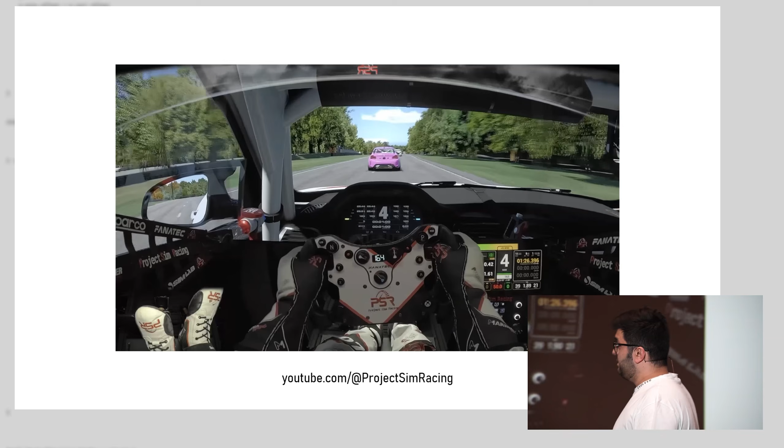On the other end of the spectrum, you have something like this, racing simulators, where you'd have a guy who has a multiple $1,000s expensive racing rig and would be moving around, honing their craft and practicing for many years in competitive online racing. And that is also an experience, and they're both vehicles, and the principles of how they were programmed in the engine are actually the same, the major principles.

So programming cars in games and car physics in games is an art as much as a science, actually, and everybody does it differently. So why is that the case? Why does that happen? Because as I said, when you have those physics-based games, or RTS, real-time strategy, or when you're moving a character, you expect a certain behavior. Why? Because we are intimate with that behavior from a first-person perspective. But when it comes to cars, the experience is not really necessarily first-hand.

It's a second-hand experience that we map into real life, and a lot of it is coming from pop culture. Almost all of us have an understanding of what a racing car is supposed to feel like, even though very few have ever actually been in one, let alone driven it.

So even a kid will know, I want a car that feels like I'm doing something when I'm shifting up gear. So the main question you have to ask yourself if you want to implement a car in a game, and this is what the talk is aimed for people interested in doing that, is what experience do I want to convey? And the more important leading question is, how do I even implement that experience?

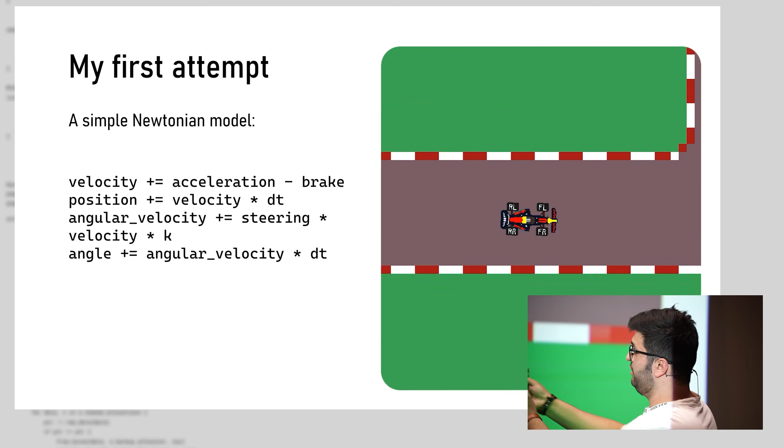But what's happening is that I'm controlling the velocity through acceleration and braking. I'm changing that multiplied by dt. The angle that the car is turning in is moving by an angular velocity that I actually smartly hook to the velocity so that it doesn't turn when it's standing still. And that's it. Now, this is as far as I could think of when I'm thinking about this.

And I'm like, does this look like a car to you? It's not. This is, I don't know what this is. Something robotic moving on rails.

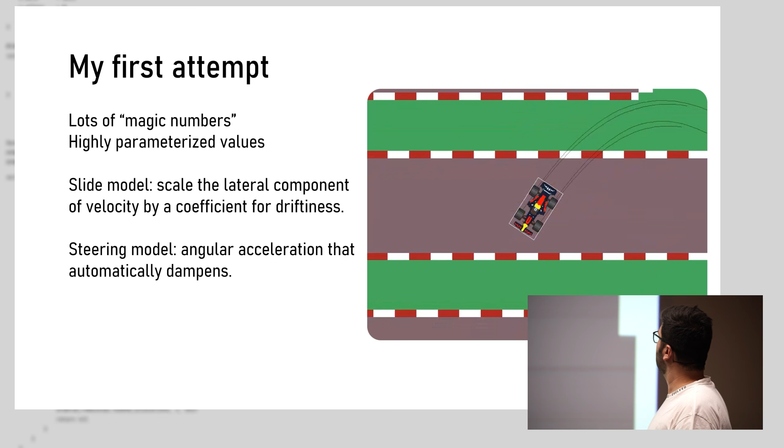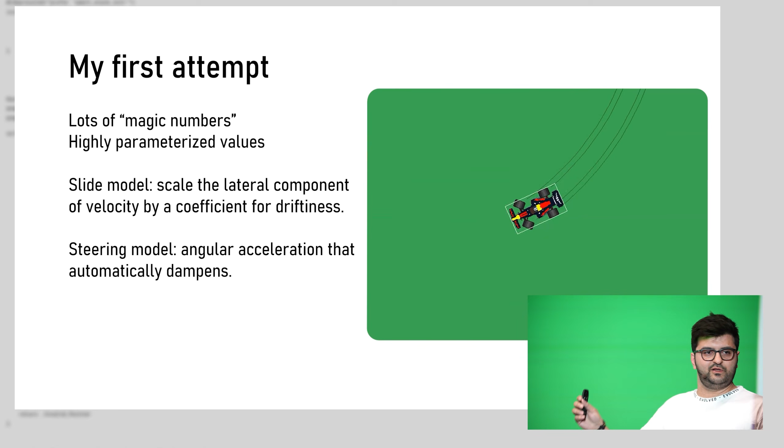So I went through a second iteration where I thought I would make it a little bit more smooth. See, at that time, I didn't know how the physics worked that well. I thought, like, I understand the experience somehow. I've played a lot of racing games, so I need the car to slide a little bit when I turn, but the slide has to be smooth, so I started to implement smooth step functions and more non-linear analytical formulas that describe the movement of the car.

And it looks better. I mean, like, it's sliding a little bit. It's drawing a trail behind it that's pushing the back wheels a bit.

Now, when I did this, it was during the time where Casey was asking, like, does anybody have something to demonstrate? And I showed this to him. And he told me, doesn't this feel to you like the car is a little bit on ice? And I think I agree. The car looks like a floating spaceship moving around. It doesn't feel like the wheels, like the tires, are what's carrying the car around. It feels like it's all on a pivot, because it is, honestly.

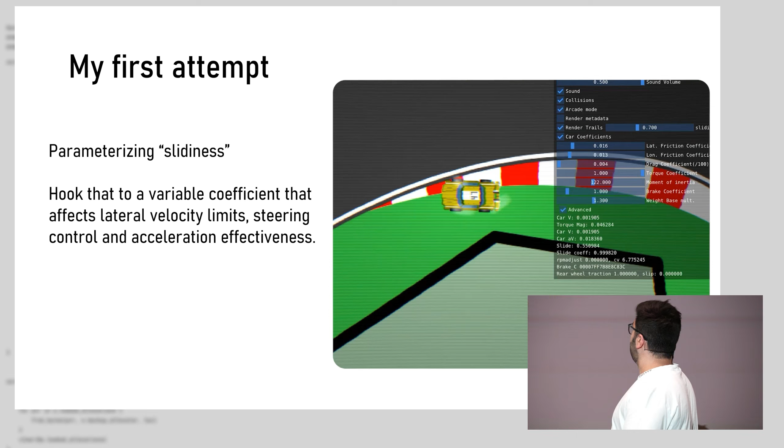So I went to a third attempt because I was dead set on faking this as best as possible. So I added even more magical numbers, and I made a parameter out of the slidiness of the car so that it increases the more the angle increases, and this changes other things through time.

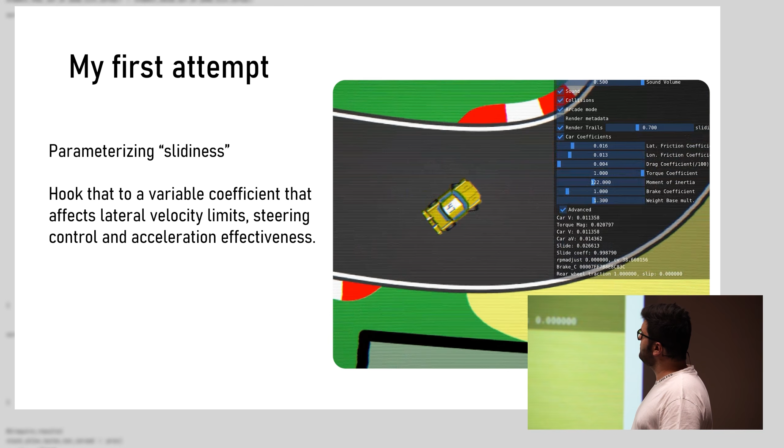And I have no idea what's happening with the video, but you see the car now. This is actually something closer to the final version that I pushed for that game, and it really feels solid somehow. It feels fun to drive in the end.

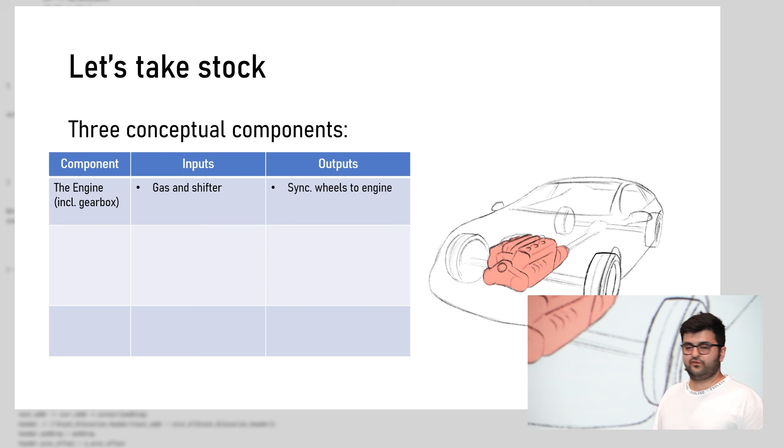In this case, this includes the gearbox as well. In simple input-output terms, this takes the inputs of the player, which is the gas and the shifter, and outputs the speed to the wheel, synchronizing with the wheel because the engine is running at a certain speed that synchronizes with the wheel speed. It's multiplied by the gear ratio.

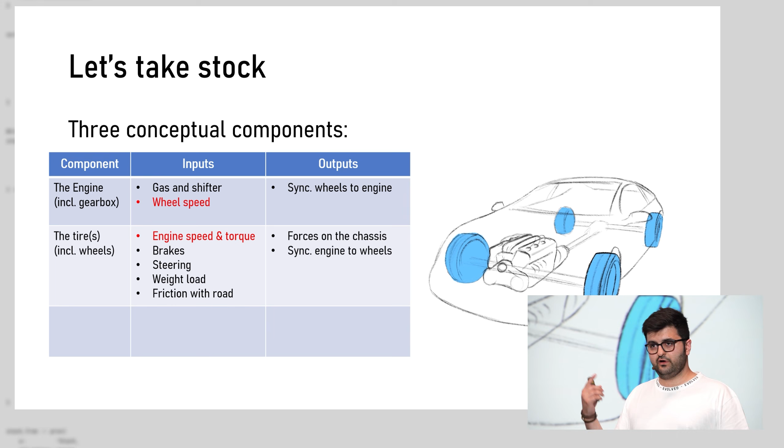The next aspect is basically the wheels and the tires. That one takes the input of the engine speed and torque from before, and takes the input of the player, which is the brakes and steering, and the weight load from the chassis sitting on top of it, and the friction with the road. That's a very important aspect we need to get into. What it outputs are the results of those friction forces that apply on the car, and also a speed that synchronizes with the engine. So there's this differential relationship we have to figure out, because the engine synchronizes the wheels, but the wheels also synchronize the engine.

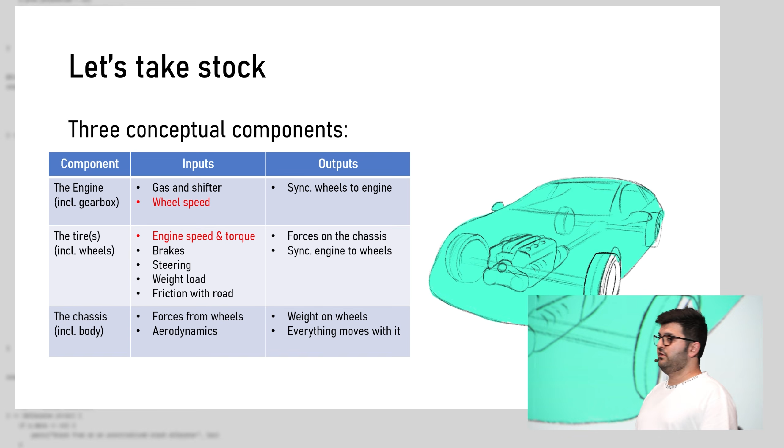The last aspect, and the simplest one, is the chassis. The chassis is a simple rigid body. This is the plug into the rest of your physics engine, because you hook everything to this part. It gets affected by aerodynamics, drag, and gravity. And wherever it moves, the wheel moves too. So that's its effect on the rest of the body.

So how do games approach doing this? Because this is way too high level, and each one of those components is complex. Well, the reality is, depending on the game, they cut corners. The problem is you can't really simulate everything. I don't think anybody, except maybe engineers in some basement at Porsche in Stuttgart, is really figuring out the fluid dynamics of fuel moving through the pistons. Nobody's doing that. In reality, even in the most complex racing simulators out there, at some low enough level there's a black box, and that black box is just calculating something similar, something simple, taking some input and churning out some output. So how do people do it?

Because it's starting to look like there's a million ways to do these things. Well, actually, there is a million ways to do these things. There's no definitive bible out there when it comes to programming vehicles. I can't point you to one implementation and say that's the solution. It's not that easy. Often the really interesting parts and the crux of the matter are proprietary, because that's where there's a lot of competition to get this right. So in the end, you will have to actively choose the corners you're going to cut. You're not going to get that satisfying feeling of getting the simulation right. I don't think you can, because you have to cut the corner at some point.

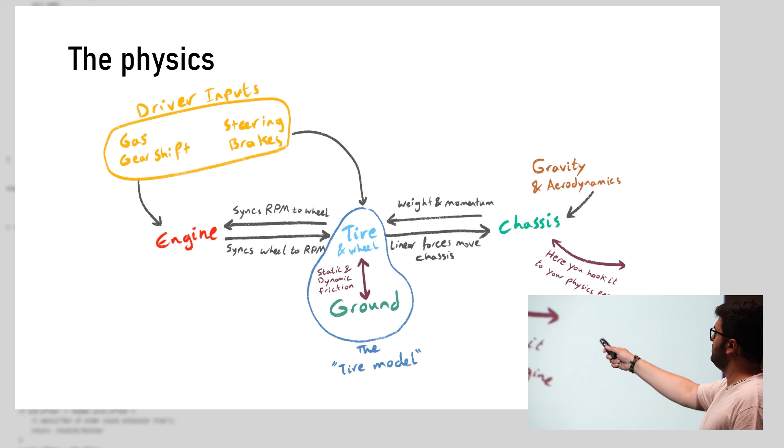So to put this all together in a visual form for visual learners, we have three components: the engine, the tire and wheel, and the chassis. There is a continuous differential equation on the horizontal axis. The engine synchronizes its speed, the RPM speed, to the wheels, and the wheels synchronize back to the engine. The wheel itself applies forces on the chassis, and the chassis moves the wheels, so there's this back and forth.

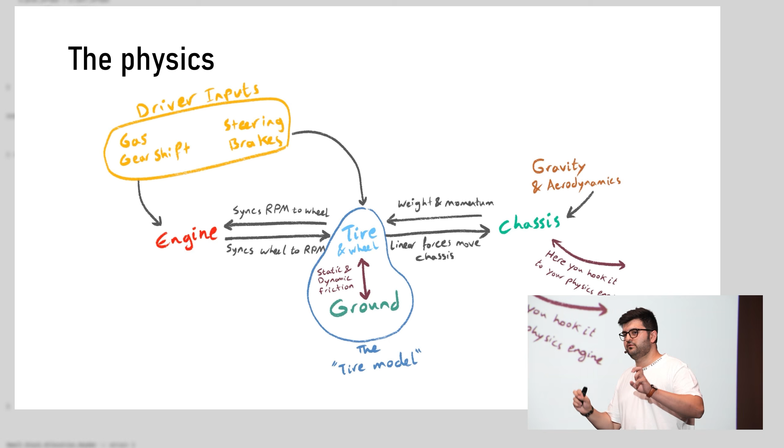The chassis hooks to the rest of your physics engine, and the meaty part of the simulation is actually the tire, because that's the thing that sticks to the ground and generates the forces. All of the forces come from the tire — that's the tire model, for those who know that term from racing simulation.

So let's start with the first section, the first algorithm: the engine. Now, the engine is maybe conceptually the most complicated part of the car — it has the most moving parts. But in code, it's the simplest part, because actually it's just a basic torque calculator. It cares about one value, and it updates just one value.

So plotting some somewhat realistic data on how much power, torque, and revolutions per minute — power is how much power the engine generates. Let's assume it's always constant; in this case it's 100 kilowatts. At a rotating speed of 5,000 RPM, it's generating 200 torque. Now that's way too fast for the wheels, especially if you want to start driving the car, so you have to scale that down. But by doing so, you increase the torque — it's just a simple physics relationship. So the transmission scales it down to 1428, the differential scales it down to 380, and in the end at the wheels, if you multiply it with the radius, you have a linear force of 9,500 newtons. It's a huge force that gets you a lot of turning for a smaller rate.

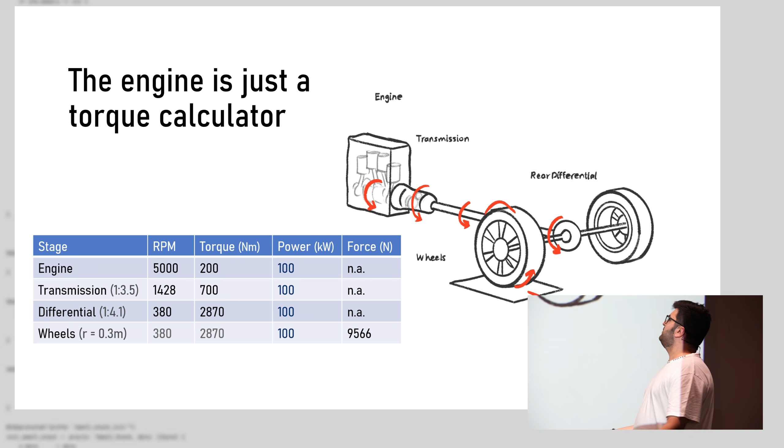Now, why am I telling you all this? Well, to understand that the power is also variable. Because for those who are intimate with cars and are fans of cars, you may recognize this shape of graph — two curves, two hills near each other. One represents the torque, the other represents the power. They're more or less conceptually the same thing, just multiplied through the drivetrain. If someone is interested in the formula, it's there.

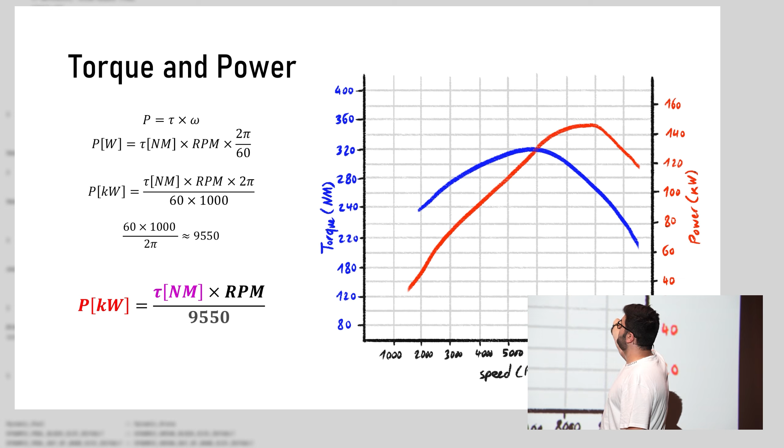What you need to care about is that if you want to make the car feel realistic, you'll realize that depending on the RPM value of the engine, you get a different amount of power out of the wheels. So if you're driving around and want to make the car feel real, you need to make it variable, even if it's not the exact same graph. If you look up different engine graphs, you'll see the peak is sometimes lower, sometimes moving left or right, sometimes the slope is steeper, sometimes flatter — each one describes a different engine. That's the important point to take home.

So, okay, I understood that — how do I put this into code? Well, you fake it. I'm going to show you a little abomination I did once. I don't think you'll find this in any book because nobody does shit like this. This is just me sitting around at Desmos for like an hour or two until I figured out something that looks like that curve, with enough knobs that I can turn to play around with it. That's it — I wanted the ability to control the curve.

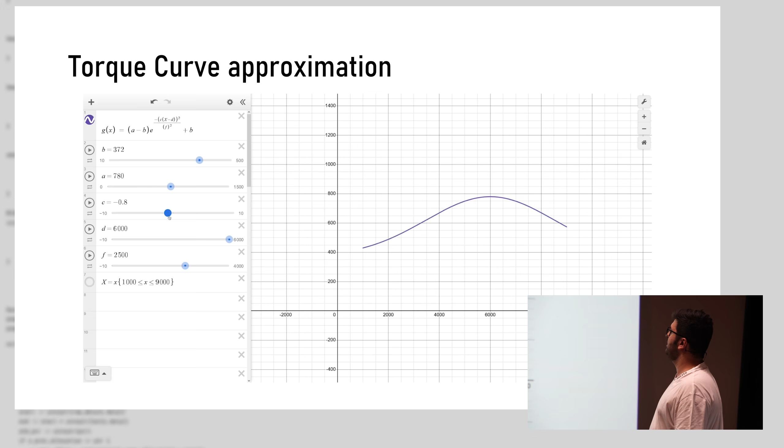These are the things you can do with it: the B value can adjust the curve baseline, A adjusts the magnitude of the peak, C adjusts the end slope, D adjusts the peak's X position, blah blah. This is what it looks like when you're playing around in Desmos, and you see I have a lot of freedom working with it. What I do is take that algorithm, implement it in code, and now I have a black box that can take an RPM variable and give me a torque variable, and I can just put it in the engine code.

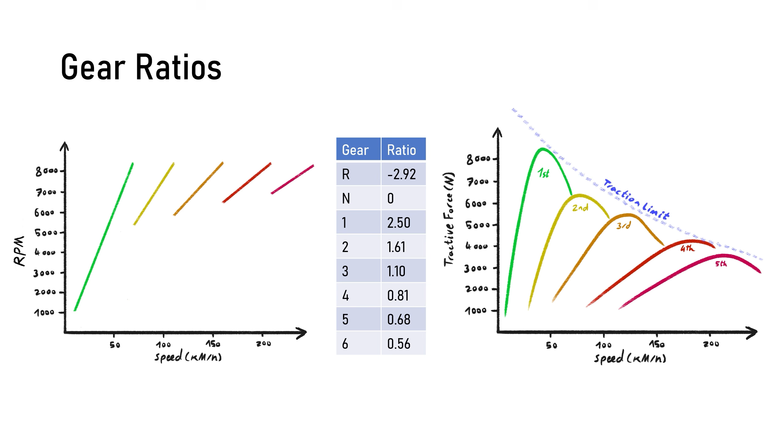Cool. So the next thing I mentioned is the differential and the gearbox. The gearbox is just a simple lookup table of ratios — that's it. Based on whatever gear you're in, it multiplies the torque and reduces the speed. These are graphs a car enthusiast might be familiar with — you have something like that gear ratio graph that plots the optimal gear. The first gear is the longest one.

RPM goes up as speed increases, then you switch to second gear, and the RPM drops back down to 5,000, then third gear, fourth gear, and so on. Here we plot the power, the force generated, and it's strongest at the slowest speed, then it drops down.

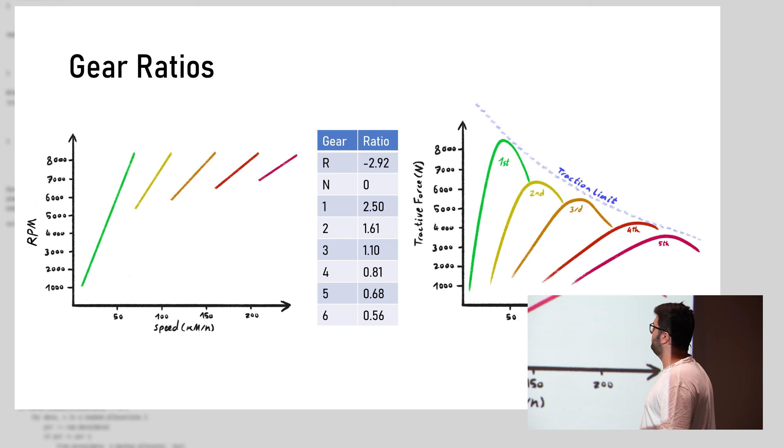Basic physics, but what you care about programmatically is just that lookup table. You can tune these values to make the car more aggressive in acceleration but weaker in top speed, and vice versa, with even more tweaks so you can tune the car. That's another thing we care about.

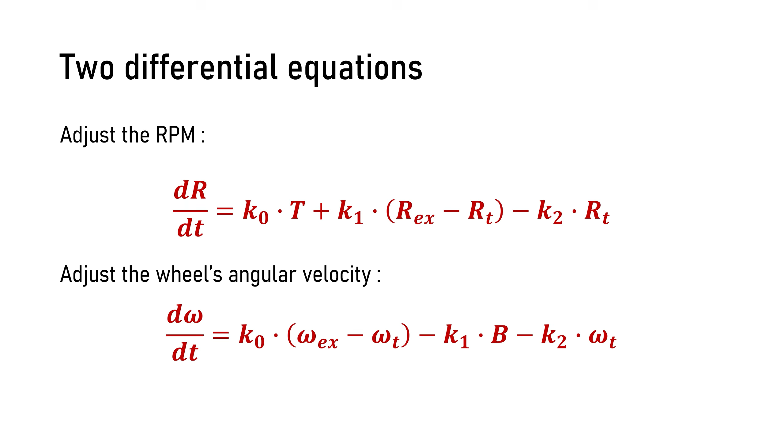Let's put these together. How do I implement this? These are the two differential equations that are hardest to crack. I try to solve them this way: what dr over dt is basically, I'm saying RPM plus equals this times dt. So I'm adjusting the RPM in one line, and the wheel angular velocity in the other. This is something you have to solve in code.

Let's look at the individual variables of how these work. The RPM's first component is multiplied by the engine torque curve, K0, times the throttle input. You take the percentage of throttle input, look up the current RPM value, and get a torque curve, then you scale it somehow.

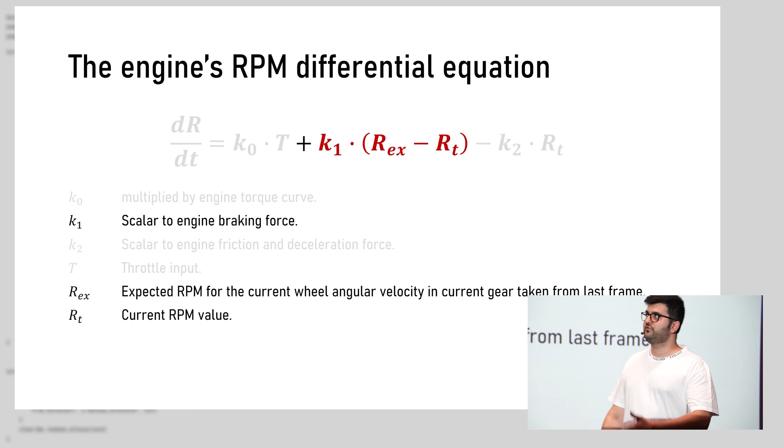You add to that - this is the solution I implemented for the differential equation. It's a spring: you take the expected value and the actual value of what the current RPM is supposed to be, based on the current wheel speed, and that scales it down so the engine tries to synchronize with the wheel, multiplied by a certain scalar to get the right feel.

The third component is just basic friction. The engine, when not hooked to anything, when you give it gas and let it go, slows down on its own because friction forces slow it down. That's the general algorithm, three main components, and you can add others depending on little factors.

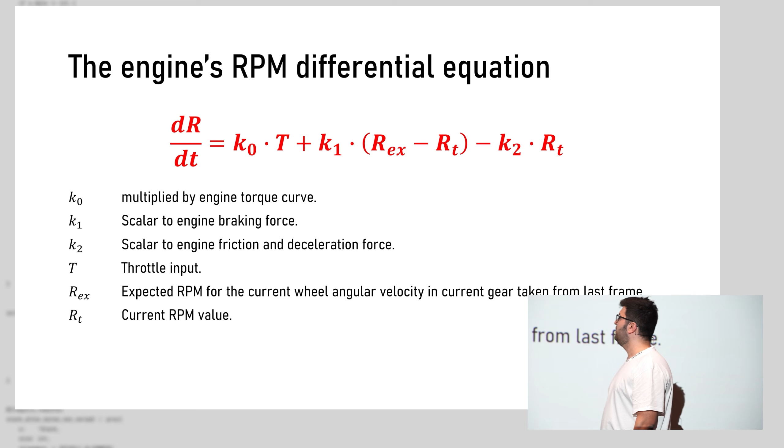In actual code, I also implement minimum and maximum RPM caps numerically, with some tweaks here and there. But that's the general way I got a good enough model working.

The wheel's angular velocity does something similar. There's a spring at the beginning: I'm taking the expected angular velocity based on the current RPM curve minus the current angular velocity, so they're both trying to converge on the same point. You multiply that by the engine torque curve, minus the braking force based on the player's braking input, minus regular friction forces that slow any wheel based on loss of kinetic energy through friction.

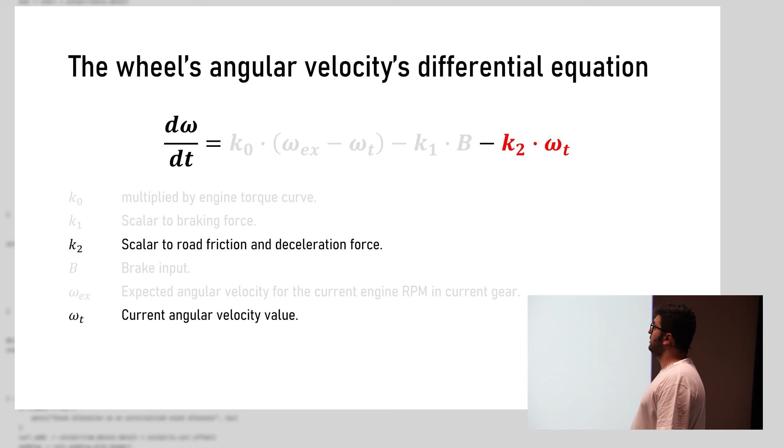And those are the two relatively bigger beasts in the physics engine of the car. And in the end, I need sound for this.

Do we have sound? You have something that's like this. This is taken from my current physics engine of the car, like my current engine.

I'm demonstrating the horsepower curve and the gear ratios, and I'm going to let you hear the sound of the engine play.

See, I changed some variables.

Interesting here is that you're seeing terms like bore, displacement, camshaft profile, turbo. Where does that go in all the stuff I mentioned? This is all fake - stuff that I am claiming relates to it. I looked up what they actually do to the torque curve somewhere, then hooked them up to the magic variables in here, like knobs, so that whenever I turn one, it affects those knobs.

In the end, you have something that feels like you're tuning an actual engine, where it's not. I'm not making a research simulation - I'm making something that makes you feel like you're playing around with an engine that somewhat correlates with reality. That's the cool part about it.

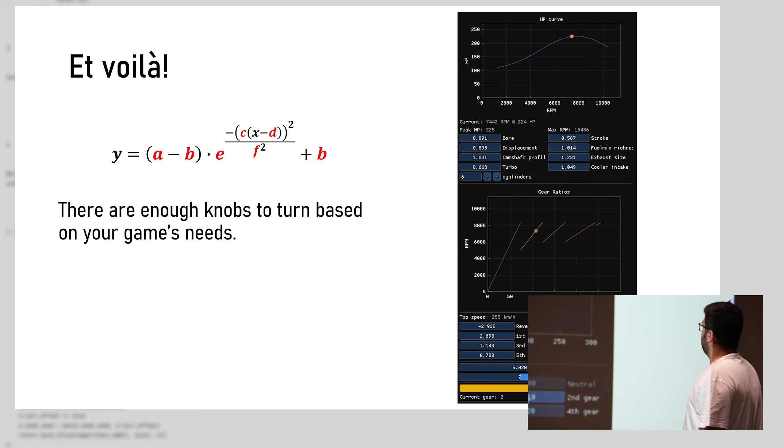Here I can change the gear ratios, and I also hooked up all those variables to the sound generation. So now the sound generation also feels like, oh, whenever I change this aspect of the engine, the sound changes - oh, I did something when I bought that upgrade at the shop when I was playing the game. So for those interested, here's a little bonus on how I did that sound simulation for the engine.

When I researched this, and I had to figure this out also for AV Racer, there are four major ways that people do this. The official way, the one we have in AAA games, is sample-based. That's when you have a lot of money and you throw it at a studio that gives you microphones you hook up to the vehicle in different positions, and you record it at different times under different stress conditions. You use all of those expensive samples to come up with a smart algorithm that blends them together, and you have something that feels and sounds really good. Games like Forza do stuff like that.

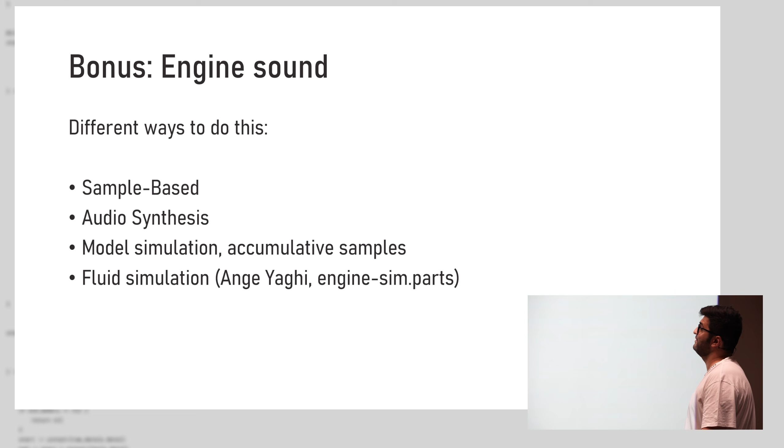Or you were penniless like I was, and I took one sample of a rev and just pitch shifted it. Sounded like absolute crap, and that's one of the main things people say when they play that game, that the sound of the engine isn't that good. But that's something you can do.

What I currently do is audio synthesis. I synthesize the audio from sine waves and noise functions. That was really fun to work on. I'll talk about that in a second.

Another one is model simulation, where you use tiny explosion samples that you play at really concentrated frequencies, and you get an emergent sound out of that. And the batshit crazy version is fluid simulation - there's a guy you can look up on YouTube, I think some of you already know who I'm talking about. It's called Ange Yaghi. He does a fluid simulation of what's happening at the engine, and through that has emergent sounds. Make sure you look that up on YouTube after this.

So here's a general pseudocode of how I implemented it. I set a base frequency based on the current RPM, and then calculate a few harmonics that relate to this frequency. Whatever harmonics, whatever base frequency, you just choose one, as long as the relationship is somewhat regular.

Then I calculate how many frames I need to complete two full cycles of that frequency. Because I have a custom engine, I have to send that sample continuously to the thread that runs the audio engine. For each frame, I generate base noise - make sure you generate base noise because that contributes to like 50% of the feeling that the car feels real - and modulate that base noise based on the RPM value. Then I calculate frame constant scalars that change the higher or lower the RPM is, and the engine characteristics.

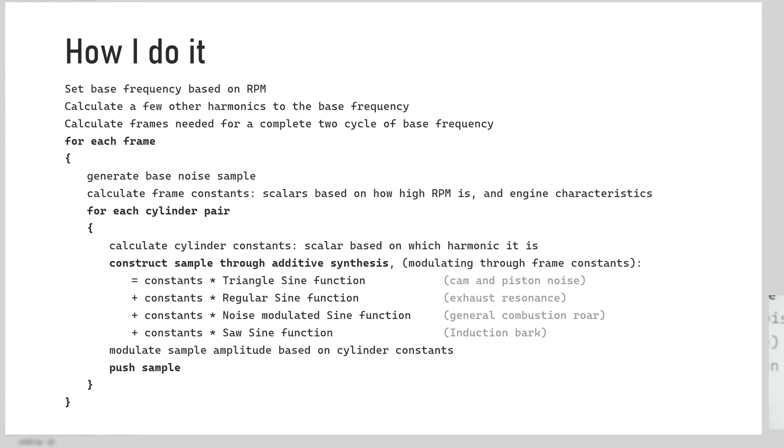Then I construct the sample through triangle sine wave, regular sine wave - I think there's also the saw sine wave and a noise modulated sine wave. And then I add a whistling sound for turbos and stuff like that. You can go nuts with this thing.

Then you modulate the end sample based on the cylinder constants, and mix all of those for a bunch of cylinders and push it, and you have that, what you just heard. So what I wanted to say is that you modulate things based on different characteristics and then you watch the magic happen. Okay, that's that for the engine.

Let's move to the second part. We were just having the potatoes, now we get to have the meat - the tire. The tire is the most important part of a racing game. If you get that right, you will have a car that feels right. If you get that wrong, it will feel wrong.

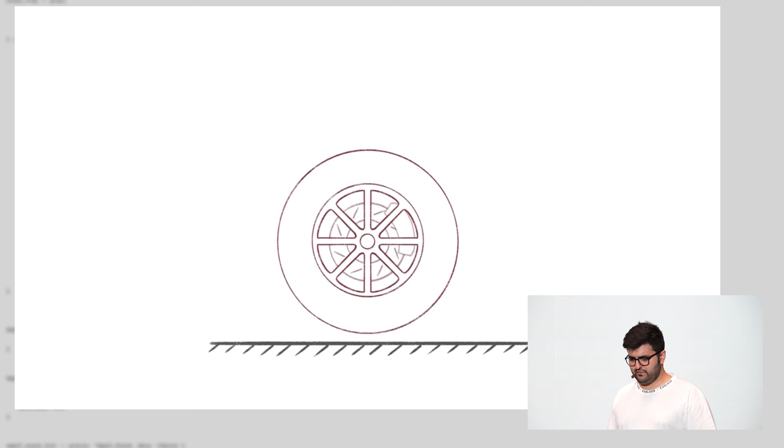Now the tire - it's a marvel of engineering. We've improved the wheel a few times, and ever since we discovered that you can use vulcanization to make synthetic rubber, it has been a game changer, because those things can move dynamically and bend, and have a lot of potential elasticity in them. That elasticity that moves is what generates the forces. It's when the wheel or tire deforms and has that increasing elastic force that makes the car move.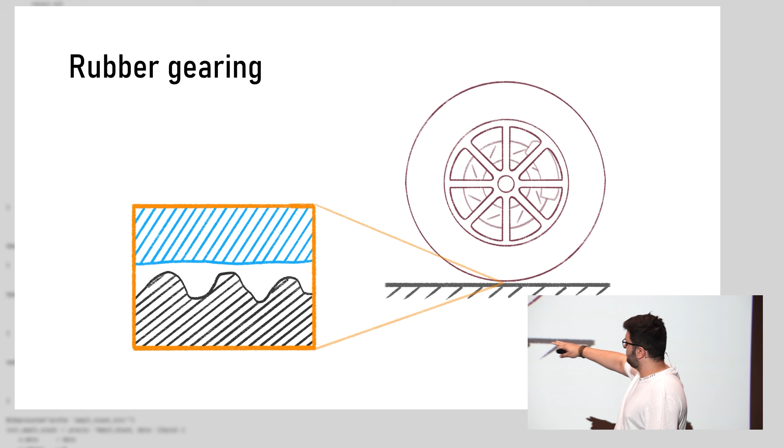So what happens at a smaller scale, to understand the physics, is you have a certain kind of gear, a rubber gearing - like this is the tire that sits right above the ground. The asphalt has ups and downs, hills and valleys, and the tire is hovering above it.

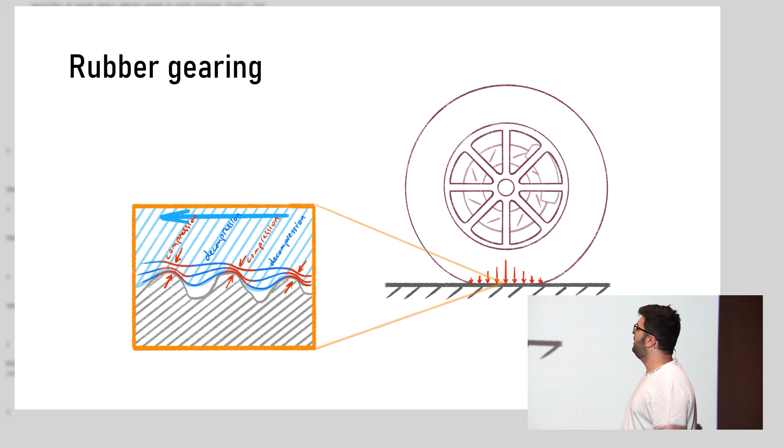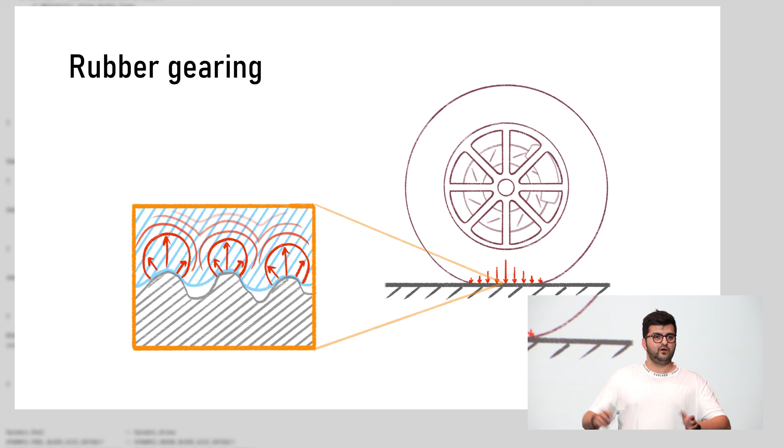When the tire sits down and has some normal pressure from above, the rubber starts to deform and it's no longer solid. What it does is start to gear with the ground. What happens is that in middle positions there's high pressure, and there's some kind of elastic, static friction sitting on it. Those are the compression zones that you have as the wheel tries to turn. This also generates heat that changes the characteristics of the rubber itself, and it improves the way it grips. This is all physics, but the idea is that you understand there's rubber gearing happening, and that's what makes the thing work.

But the problem is that elasticity is not endless. It's not a fluid in the end, it's a solid, so it has a limit. As long as you're within that limit, you can have force and control over the tire, because as soon as you leave that limit, the tire starts sliding. Now you're no longer controlling the tire's contact to the road.

In both of these topics, a very important distinction needs to be understood between static friction and dynamic friction. I'm sure a lot of you already know this, but I'll reiterate for those who don't. Static friction happens when, like, my laptop's sitting on the table - it's in friction. Even if I start to lean the table forward, it may stand still for a while. This is static friction - there's a friction between the thing and the table, there's actual gearing happening at the micro level that's preventing it from moving down. As soon as I let it fall down entirely, it will start slipping - that's dynamic friction. Understanding this concept of static versus dynamic friction is really helpful to understand what I'm about to say in the next few slides, and you really need to understand this, because if you do, it's really easy to implement afterwards.

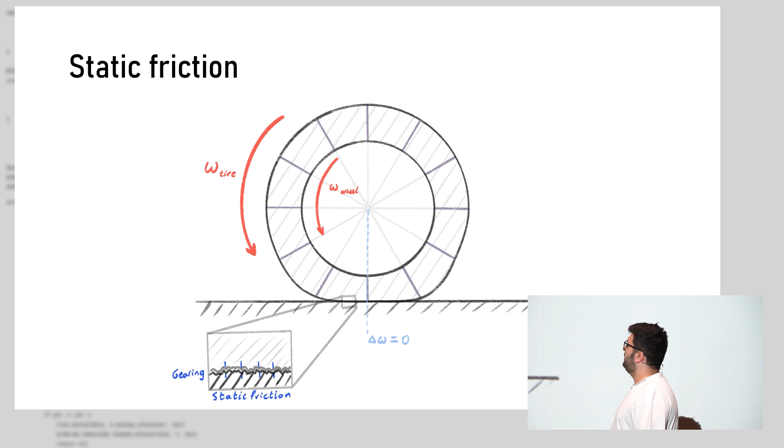So for static friction, let's imagine a tire sitting on the road with a normal force coming from above, and it's just rolling down the road. The important variables to look at here are the angular velocity of the wheel and the angular velocity of the tire on the outside - they're equal to each other. It's just rolling, same angular velocity. There's rubber gearing happening and static friction constantly happening on the ground.

So that rolling tire - what happens if I hit the gas and give it a little bit more gas? What happens is that the inner wheel, the thing that drives the tire, spins at a slightly higher angular velocity than the outside tire. So it starts to deform, starts to twist. That discrepancy causes deformation of the entire tire. You have compression zones in the forward position and decompression zones in the backward position, and this starts to stress the rubber - this is what in the end generates the force.

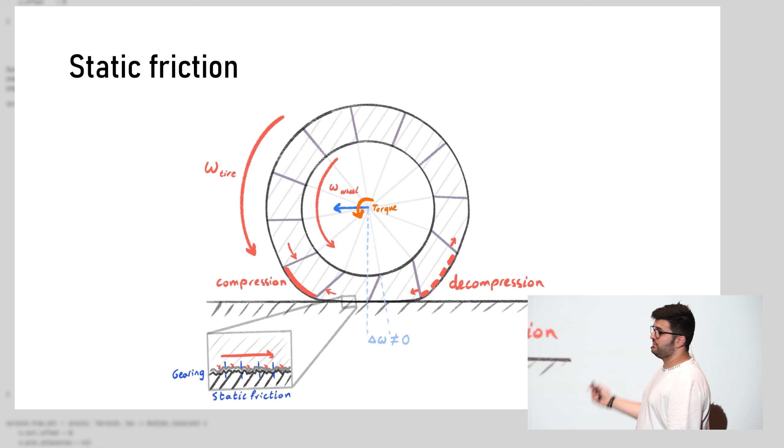Now if I add too much power, this wheel starts to spin - I can do donuts now. At that point they end up having more or less the same angular velocity, because now there's no twisting happening, it's just sliding on top of it.

So why am I telling you all this? Well, because the difference of the angular velocity is something we need to care about. And that thing is called the slip ratio. The slip ratio is a term I hate because I think it's a misnomer, but it's the official term that people use when it comes to these things. I don't think it describes really well what it is. I think it's just the difference between the driven wheel and the rolling wheel.

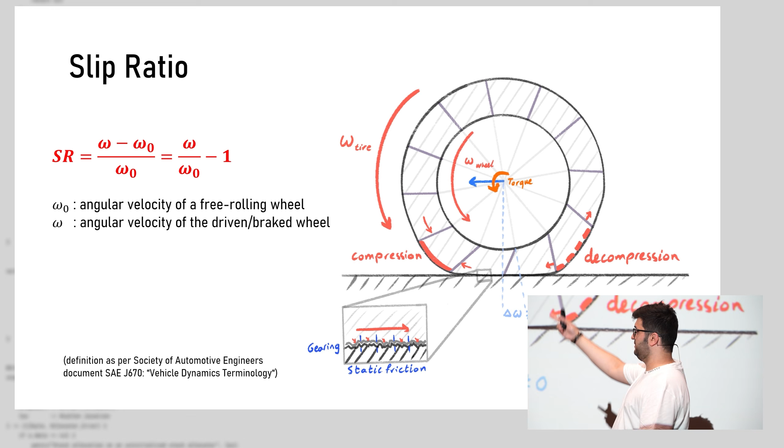That's the way it's defined by Society of Automotive Engineers, as the formula above. You basically just need to care about the angular velocity of the wheel compared to the angular velocity of the tire. That's more or less what it is. Another way to express it is like this, by the Calspan Tire Research Facility. Calspan is currently actually working with BeamNG Drive on their tire models for that game. They get access to the nice toys. You as an indie developer don't.

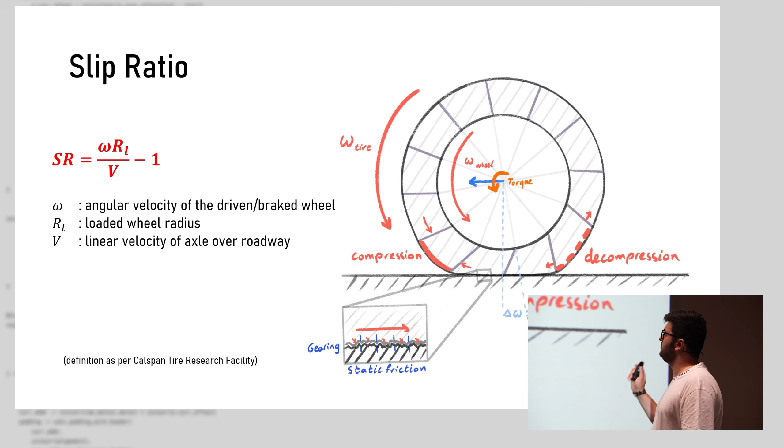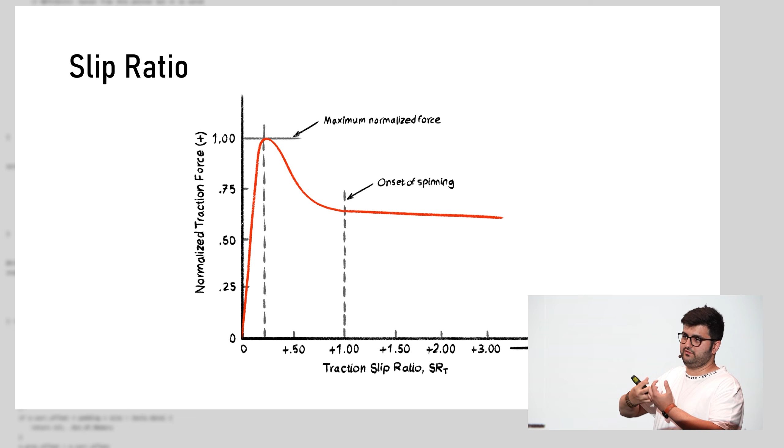And that's the point where the wheel no longer can grip with the ground anymore. It starts to slip, and so it starts to drop until you reach a point where it's just spinning. But even then, there is some traction force pushing forward. So like even the spinning wheel pushes the car forward a little bit. Or in the other case, if you're braking the wheel, you have the case where you lock the wheels, like when you see it in Formula 1 cars a lot, where they hit the brakes so hard that they lock the wheels and the wheel's just sliding forward, but it still slows the car down somewhat. So like there's always some generative force.

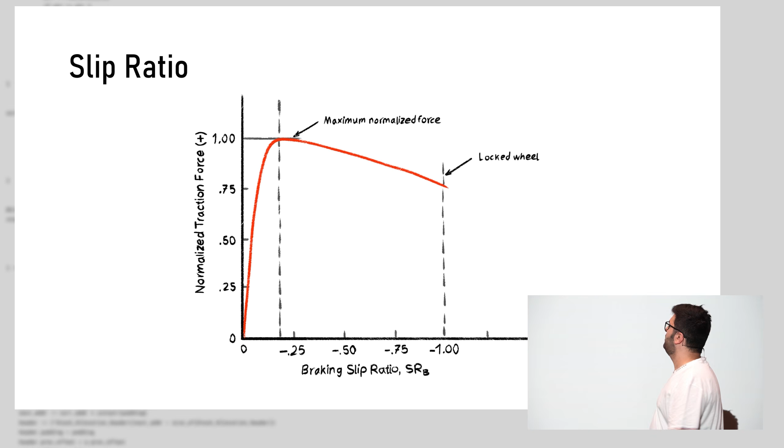But you can also see that the braking slip ratio curve is a little bit more gentle. It has something to do with where the compression is happening in the direction of the moving tire. You can look that up if you're interested, but it's not very important for this.

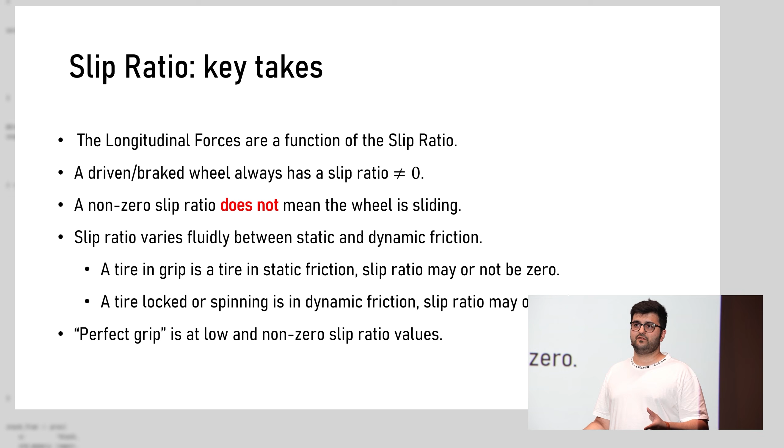The idea you should care about is that there's a curve that looks like this that I need to somehow put into code. So to sum all this dry stuff up, the longitudinal forces are a function of the slip ratio, and a driven or braked wheel has a slip ratio that is not zero. A non-zero slip value does not mean that the wheel is locked or sliding, because the amount of slip ratio does not really correlate directly with whether the wheel right now is in complete static or dynamic friction. It all depends on many factors. So like all of this is fluid, it goes between static and dynamic friction. And perfect grip when you're driving around is when you are at a low enough but non-zero slip ratio.

This is for the longitudinal force. Okay, so how does this translate to code? Good question. You remember when I talked about the abomination I showed you a while earlier? Somebody did a non-abomination, but it's the same idea, and it's an analytical function that describes those forces. That person is Hans B. Pacejka, a Dutch-born tire scientist who spent the entirety of his life working on tires.

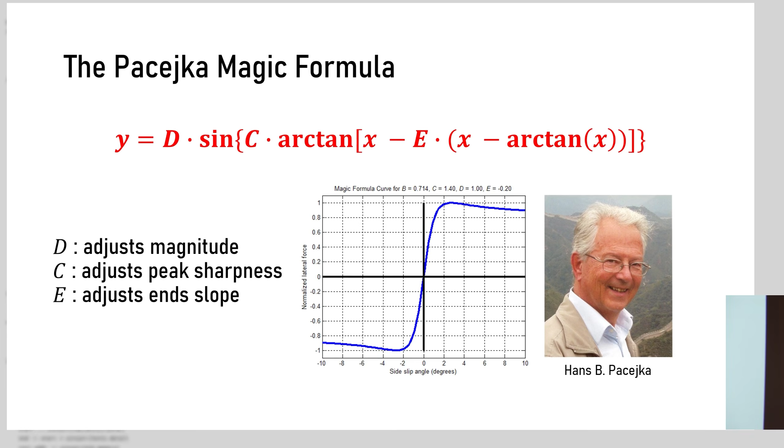And he came up with this beautiful formula up there with 3 knobs that you can work with. And those knobs adjust the magnitude, and they describe the way that curve moves around. You can use something like this in code to come up with a number that helps scale your forces. So in the end, actual code looks like this.

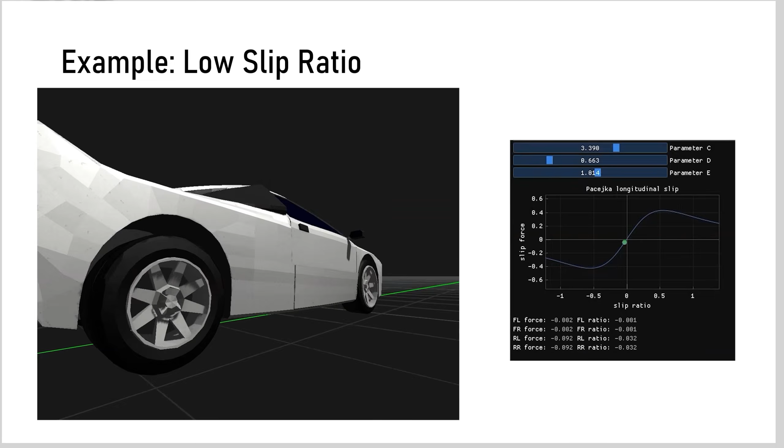Okay, so that's the longitudinal component. We can look at the lateral component now. That's the more interesting one.

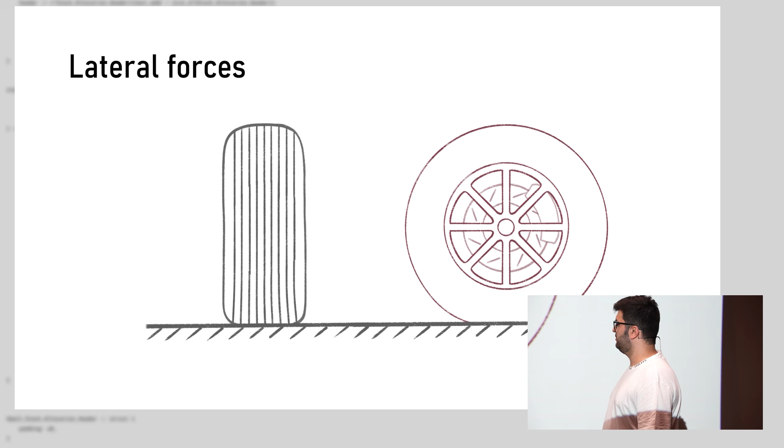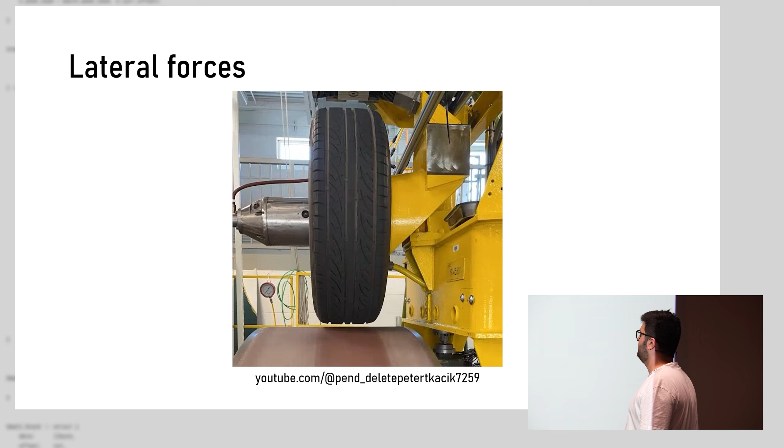When we look at the wheel, now we were looking at it from this side, now we're turning it 90 degrees, we're looking at it from this side. When a wheel turns, it actually deforms around its contact patch with the ground. So there's a lateral force that is deforming it somewhat like this. A demonstrative video - this is a video of a rolling wheel on a treadmill where they're turning the wheel as it moves, and you can see the more the angle of the movement is, the more there's a large deformation happening at the tire itself at the bottom. Another example is also really cool: the higher the load you put on it, the more it deforms. Like here, it's turning left and right and then adding a little bit more pressure, and then turning left and right and then adding a little bit more pressure. And you can see the deformation, the patch is actually moving left and right now, increasingly.

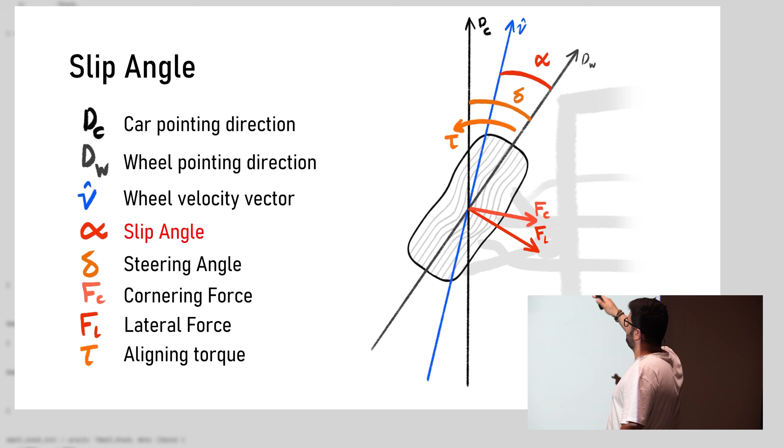So what you need to care about when it comes to this thing are a few angles. In this case, we're looking at a tire top down, the front left tire of the car. The car is pointing upwards in this case. DC is the vector where the car is pointing. DW is the direction that the wheel is pointing. V, the blue vector, is the velocity vector of the wheel and the tire, of the wheel and the car. In this case, they're the same, but usually there's some sort of angular momentum to the body of the car that changes the velocity of the wheel, but it's not important. The idea is that there's a general direction of the velocity of the wheel.

And through all of those, you get two angles. You get an angle between the direction of the wheel and the direction of the car - that's like the steering angle. And a more interesting angle is between the direction of the wheel and the velocity vector. That angle is called the slip angle. We're like, wait a second, wasn't there a slip angle before? There was a slip ratio before. This is a slip angle.

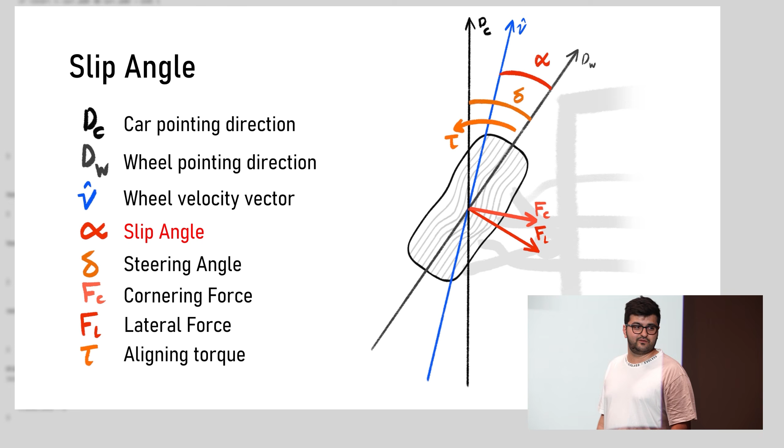And this sheds more light on why I hate those terms, because they're confusing. A slip angle has something to do with the lateral forces. The slip ratio has something to do with the longitudinal forces. Really easy to confuse. I would much prefer if they use like SL and... no, SL and SL doesn't work either. So it has to be S longitudinal and S lateral.

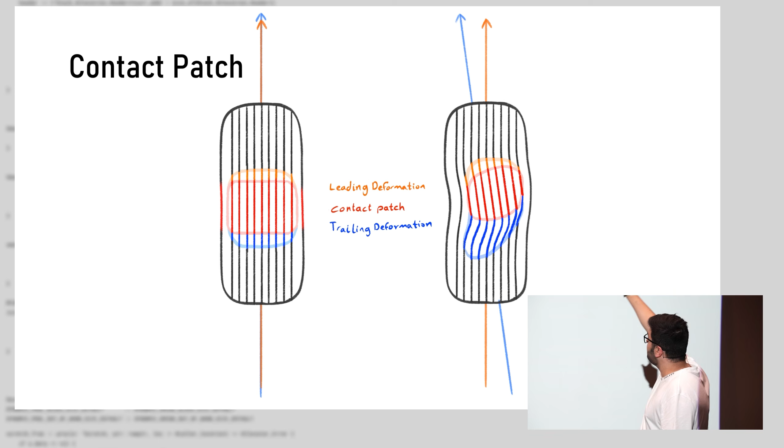So what happens to the contact patch? That's what I wanted to demonstrate to you, so you can understand visually what's happening, because you don't really need to simulate this - this is what people at Tire Research Facility and BeamNG Drive do. So the contact patch deforms itself - there's a position where it's in contact with the road where it's completely in static friction. That's where it's immediately, entirely pointing in the direction of travel.

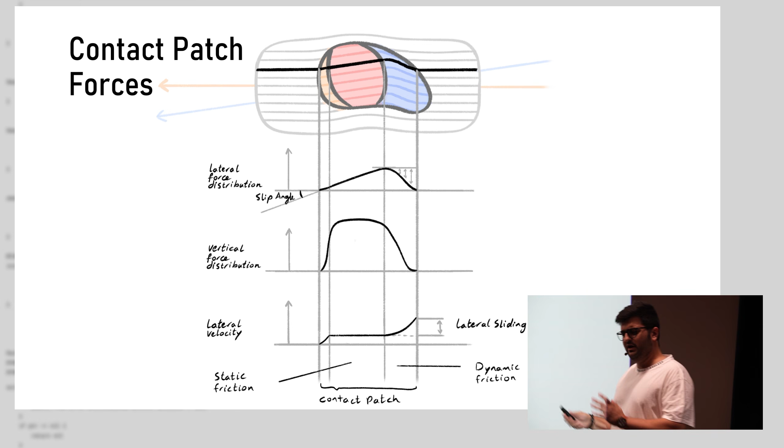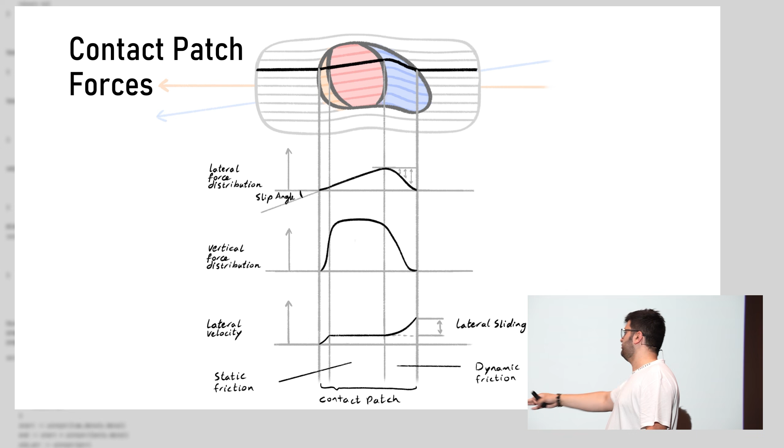And the rest is where it starts deforming. Now, tire engineers have seen that there's actually a very interesting distribution of forces that is not really constant all over. There's a whole thing we can simulate out of this, and this is what really advanced car simulators do. They add testing points all over the contact patch so that they generate a different force based on different testing points. You don't really need to go this deep if you're doing just a regular car. But if you're interested in actual tire simulation and making a sim racer, this is how deep you need to go. But what you need to care about for this talk is that the central point is in static friction, the ends are in dynamic friction. That's more or less it.

Here's a somewhat animated form, so you can see how the more the angle increases, the thing deforms and starts to move. Also, the lateral forces push the thing a little bit to the right.

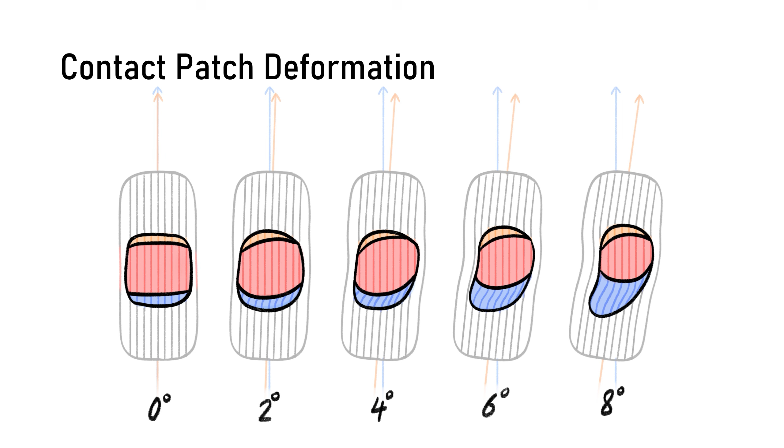You can see here it's demonstrated how the contact patch gets smaller, actually, the more angle you have, until you reach a point where you have a large enough angle that the contact patch is basically zero. That's where you have completely dynamic friction, you're just slipping on the road. Now, where is this observed in real life?

In the concept of understeer and oversteer. A lot of people who are interested in cars know this, but for those who don't: understeer is when you want to turn at a certain radius and the car does not want to give you that smaller radius. The car really doesn't respond that well, you have a larger arc.

Oversteer is the more scary one, where you lose control of the back wheels and the car starts to slip. On icy roads, for example, you have that, or when you're driving a rear drive car and you add a little bit more gas, the car starts to slip and you have that drift. This is what drifting is in the end.

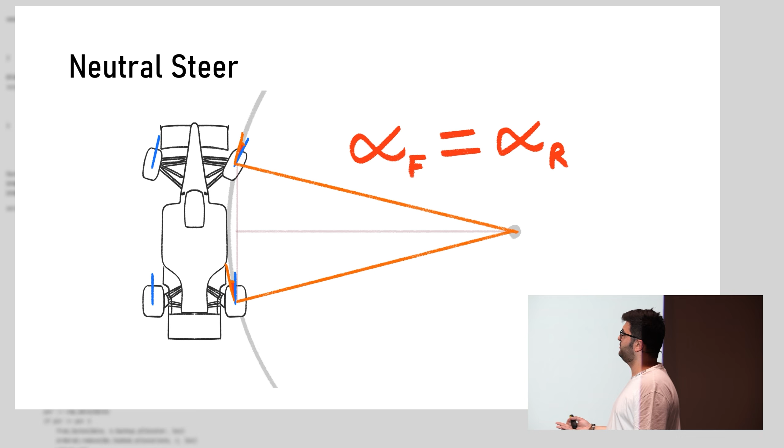How that relates to the slip angles: when you're neutral steering, where you have full control of the car, the slip angle of the front wheels and the slip angle of the back wheels are more or less the same. In understeer, the front wheels have a little bit larger slip angle than the back wheels, and in oversteer it's the other way around.

Now, do I need to code this? Not really, because all of this is emergent. If you simulate the tire forces correctly, all of that stuff is actually emergent behavior. But if you don't do that, then you have to fake it, which is what I did for AV Racer. Let me show you a little bit more graphs.

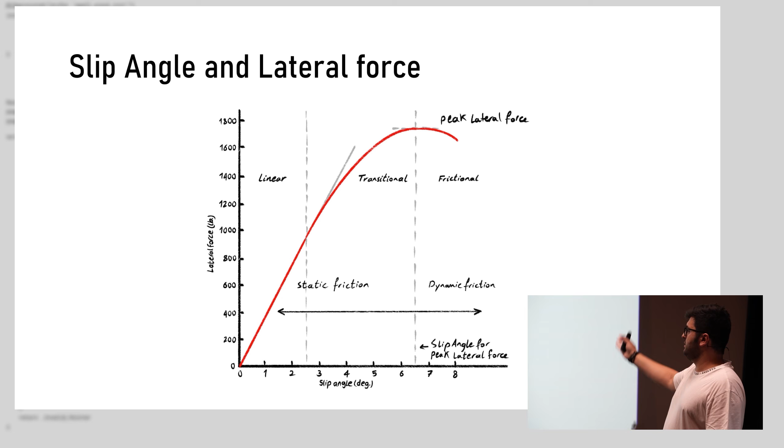This is a general description of the connection between the slip angle and the lateral force. You can see it behaves the same way as the original graphs I showed you before for the longitudinal aspects: increasing quickly, reaching a peak, and then trailing down. Another aspect we need to care about is that the normal force on the wheel pressing it to the ground also changes the behavior. So there's a lot of factors you care about here.

The good thing is that all of this can also be simulated with the Pacejka formula that I showed you before, the Pacejka magic formula can be plotted in. The actual code for this is just four lines: you calculate the angles that you care about, you plot it through the Pacejka formula with certain knobs that you've twisted to fit a certain characteristic, and you get a lateral force. This is what it looks like.

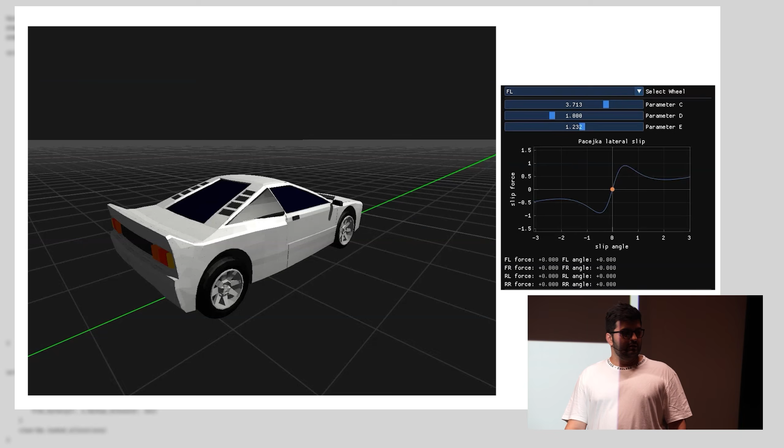Now, in this case, as I'm driving around and turning, the position of the current generated slip force is changing. This is based on the front wheels, and I get that feeling that this is what causes the car to move left and right.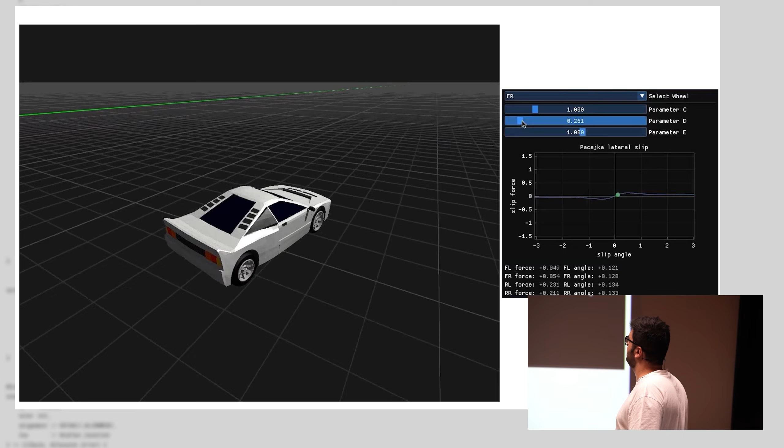But the interesting part I want to show you is what happens when I start to play with those knobs. Here are the front tires — I'm going to decrease the amount of generated slip force, and now I'm getting understeer. Now I'm turning the car left and right, and the car is not really responding to the direction I want to turn it. If I return it back and go to the rear wheels and do the same, here I get oversteer. The car is starting to slide more, I'm getting a drift all of a sudden.

And all of this is just basically me changing one floating point variable. That's it. That's the fun part about developing cars — once you get the building blocks right, you get a fantastic sandbox where you can test a lot of behaviors.

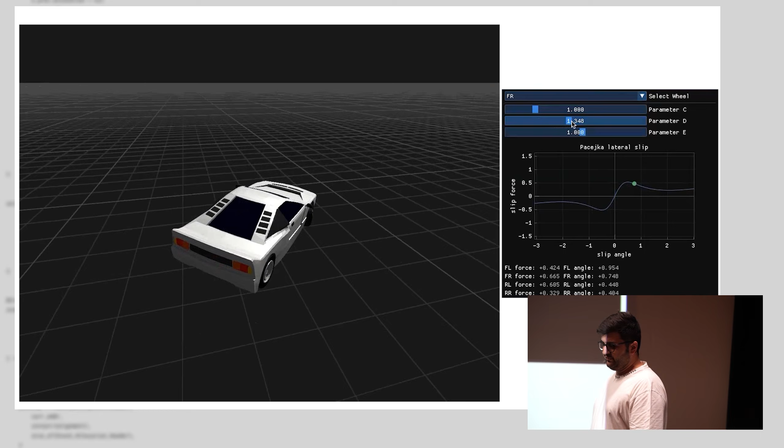And out of these changes, you can say, okay, what if I attach this to the weather so that maybe if it's wet, this variable goes down? What if I attach it to how much wear there is on the tire, and how much heat there is on the tire, and so on? That gives me those results. So it's pretty fun, I recommend it.

Key takeaways for the slip angle: the slip angle is the angle between where the wheel is pointing and where it's going. The lateral forces are a function of the slip angle.

The difference between the slip angles of the front and back axle is what generates the experience of driving the car, the stability of the car. The larger the slip angle, the smaller the contact patch, the more you move into dynamic friction, the more you get into slide. The vertical load also amplifies that.

The key takeaway is that all of this is emergent, and the more parameterization you have in your code, the more it helps you make it realistic. But it's not haphazard. If that parameterization is based on actual physical understanding of the models, it will help you a lot more. This is what I touched on at the beginning. The more things that are changing dynamically over time under different conditions, the more realistic it feels, because there really are very few real constants in physics.

Now the kicker in all of this, the most complicated part of this talk, and I don't expect everybody to understand it, it certainly took me a lot of time to wrap my head around this, is the relationship between lateral and longitudinal forces and how they affect each other. I showed you earlier you can plot those in a circle, and this is actually one force we're looking at. We're talking about one tire, not two different things.

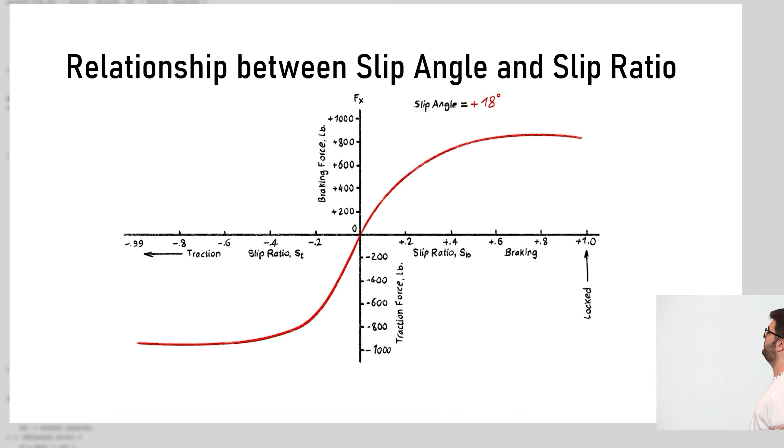What happens is this: when we observe the curve of one while changing the variable of the other. If I'm looking at a curve that plots the slip ratio, that's for the longitudinal force, the braking and traction force that comes out — this is basically the Pacejka formula, by the way. Now what happens if I change the slip angle? You can see that as the slip angle increases, the curve deforms more. So depending on the slip angle, I have an entirely different looking curve.

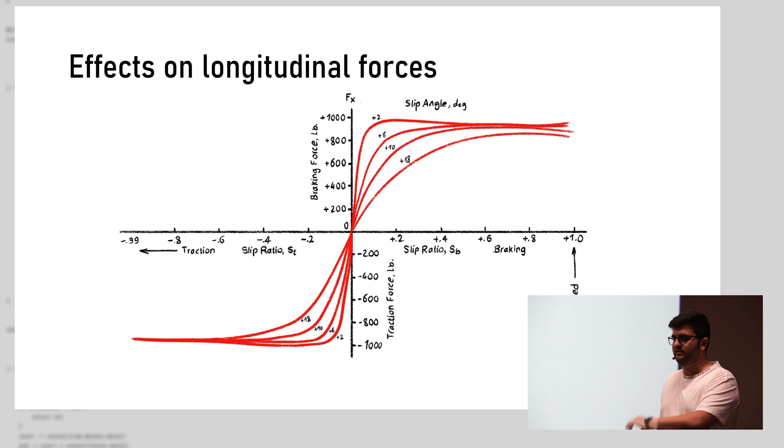So like all the variables I was talking about earlier, the knobs, they need to turn themselves as the angles change. This is also true for the lateral force — the lateral force also changes depending on the slip angle. So all of this is also changing with time.

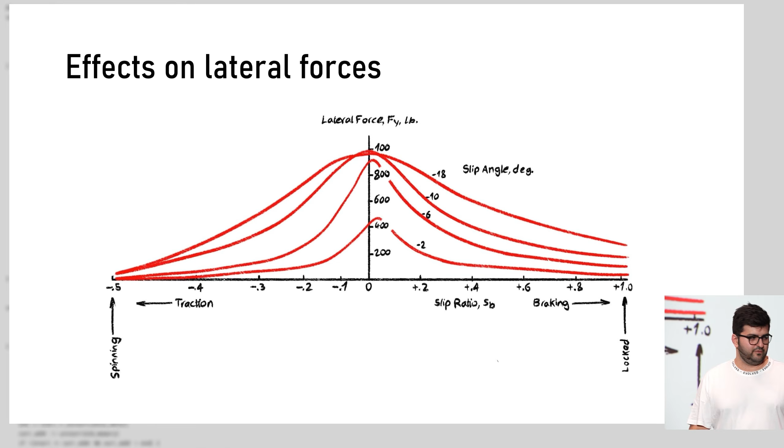To sum it up: the longitudinal force is a function of the slip ratio, the lateral force is a function of the slip angle, and they both affect each other. Okay, this is where it gets complicated.

We talked about the friction circle before — I actually called it the range of elasticity, but people call it the friction circle in books. This is where you try to conceptualize the maximum limit of the combined force of the longitudinal and lateral aspects, using that quadratic formula, and how they affect each other.

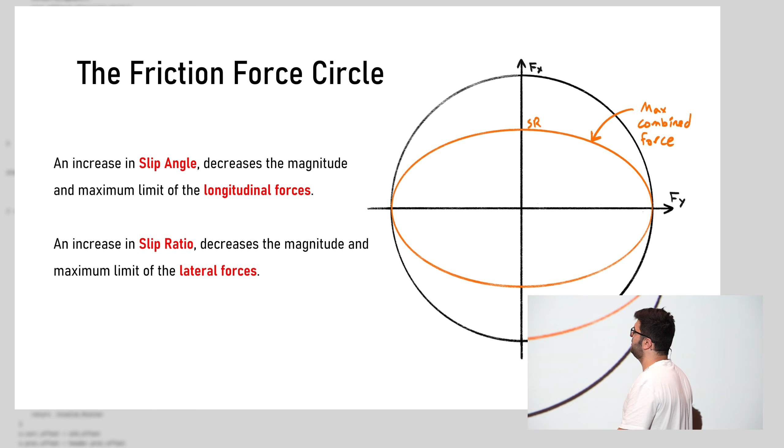To visualize how they affect each other: when one increases, it squeezes the circle in a certain direction. In this case, a certain slip ratio changes how much lateral force range you have. As the slip angle increases, it changes the limit of the longitudinal aspect, and as the slip ratio increases, it changes the limit of the lateral force. This is again why I hate the terms slip ratio and slip angle — even without using them it's hard to wrap your head around, and now you have something confusing you while you're doing that.

People have plotted that on combined graphs. Here you have, on one axis, the same graph as before, but both on one axis. On the x-axis, you have how much lateral force correlates with what slip angle. On the y-axis, you have how much slip ratio connects to how much traction force, and the combined force is then plotted — you realize based on how much one or the other is, it changes.

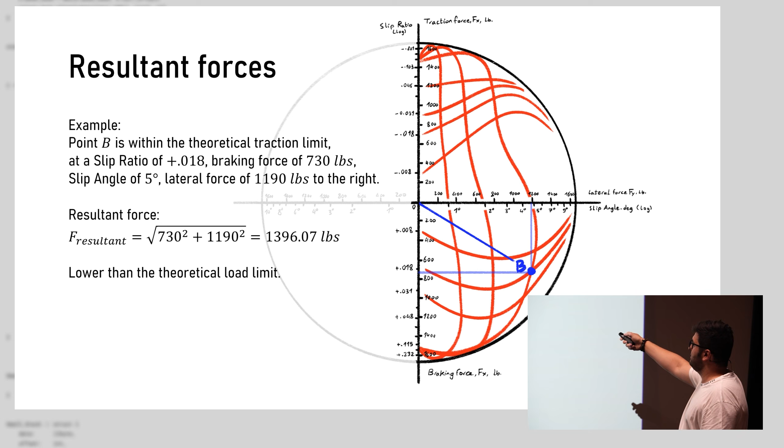So you have this combined resultant force. I know you don't need to care about plotting this exactly — what I want to offer is just a general understanding that these things are related and affect each other. If you're at the limit, the resulting force is at the limit of that circle, that's the maximum force you can generate. If you're within it, you're in a safe zone, so you can add more force. To make it more understandable in racing terms, there's the G-G traction circle.

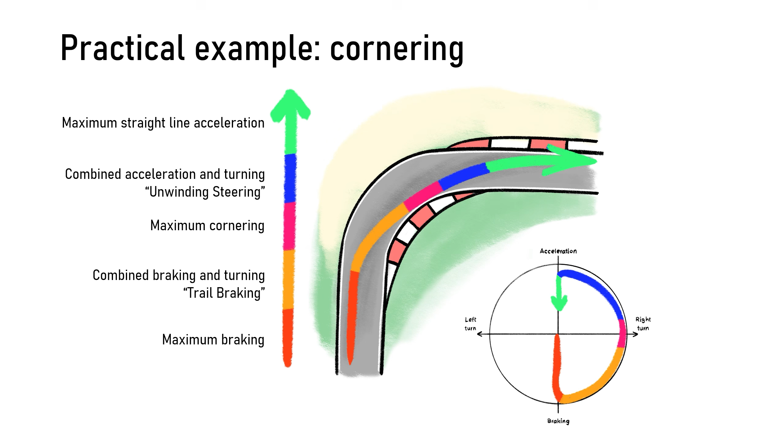A more visual example is this one. This is what it looks like when a racing driver takes a corner. This is the circle down there, and we're color coding how the steps happen. First, you do maximum braking until you reach the beginning of the corner. You get increasing braking until you reach the maximum, and then you start turning. As you start turning, you're reducing the brakes because you don't have that much budget, so you have to reduce the brakes—that's what they call trail braking. As you increase your turning, you take your foot off the brakes until your foot is no longer on the brake at all. That's where you're at maximum cornering.

Then as you get out of the apex of the curve, you start to increasingly add more gas. That's where you get acceleration, called unwinding steering. And then you have maximum acceleration when you're back on the straight line. This is what a racing driver feels like, and this is the stuff you want to implement in your game if the person playing cares about a somewhat realistic racing experience.

So how do I implement this relationship? Unfortunately, this is the experimental part of every racing tire model. A lot of it is proprietary, and many people approach this differently. It's not impossible, but a lot of it can be helped if you have an actual testing facility where you can test those things and figure out through the graphs what kind of analytical relationship you can get out of it. There are certain models also available online, like the Pacejka model, the Radt, Fiala, and Dugoff models. You can look those up if you're interested. Those can give you clues on how to implement this, but that's a bit beyond the scope of this.

How I approach this, I do it twofold. After I calculate the individual longitudinal and lateral forces, I scale them down so that they fit an imaginary normalized circle. I also change the knobs themselves, so that the constants of the Pacejka formulas also change as the slip angle and slip ratio change. Out of that, you get an interesting relationship that actually feels nice to drive.

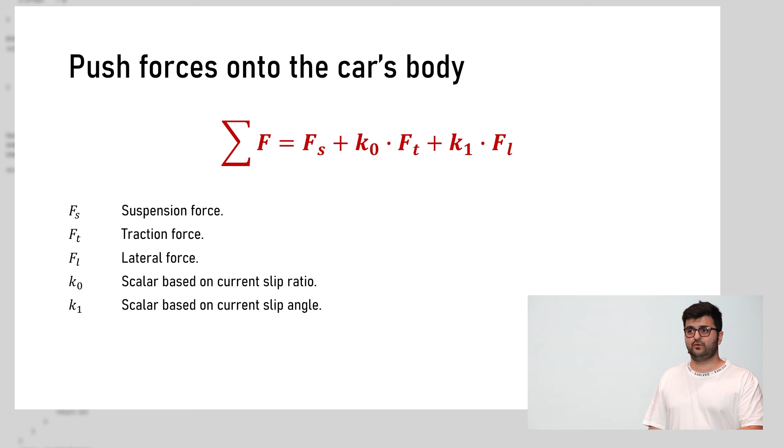One thing I haven't addressed while talking about this is how do you do collision detection with the road for the tires? You can do it two ways. One way is through proper mesh collision, where the tire mesh collides with the road, or you can do it as many car games actually do, through raycasting.

So you cast a ray from the connection point of the tire down, in the direction of the normal of the track, plus the current suspension length, which is just a spring, and then you get whether it's contact or non-contact. That has borne fantastic results, actually. It doesn't need to be more complicated.

And the last aspect of all of this is the chassis. This is not a huge section, it's actually just one slide. It's just your regular rigid body physics engine, because you're just simulating a box in the end that collides with the road.

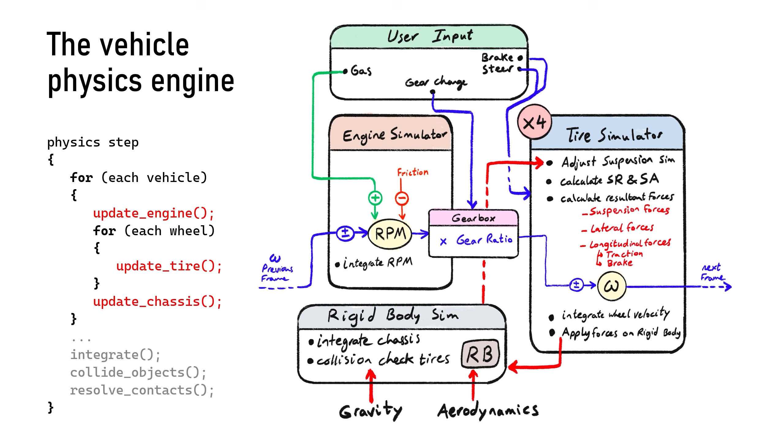So that's the vehicle physics engine, in short. The three major steps, I put it also in a graph that tries to visualize the direction of things. The one key thing to keep in mind is the blue line that runs horizontally. You're taking the previous frame's results, because you're solving two differential equations at the same time, so you have to take the result of one in the resolution of the next for the next frame. In this case, I'm calculating the engine's RPM first, multiplying by the gear ratio, and calculating the wheel's angular velocity, then I take the angular velocity for the next frame and so on. I apply the three main forces I mentioned through the 4 tires on 4 points on the rigid body.

And you got something that looks like this. This is currently the current version of my engine. You can see on the right that even the curves are changing as the car moves around. Let me go back and start it. You can see them as the car turns, the curve's peaks are also moving. This is what I meant when I said I was changing the curves as the angles are also changing.

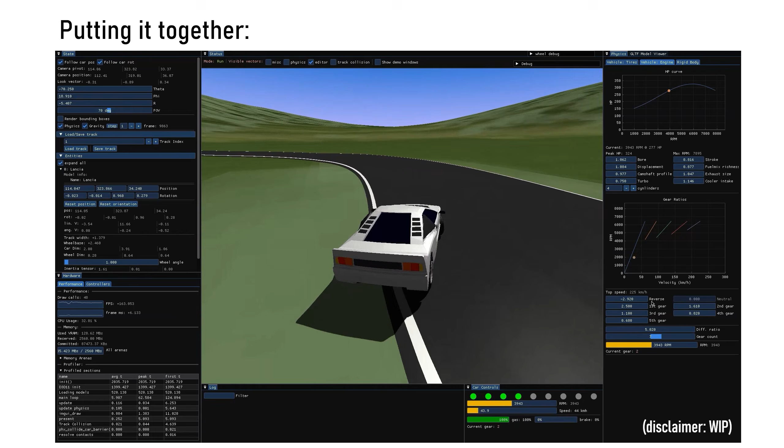And the resulting experience actually feels somewhat like a car. It's not finished, I still have to tweak a lot of things. Actually, this whole talk has been one huge rubber ducking experience for me. I have many ideas of how to improve this through researching this, and I was stuck on this for months, actually. So I'm excited to get back to work on this.

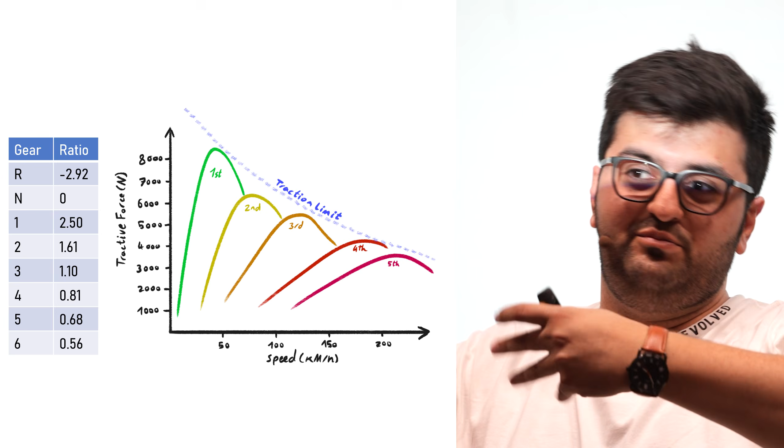There is in the graphs. You can see on the right graph that there's a point where the first gear's power drops and hits the peak of the second gear. That's more or less where you'd time your peak shift, because there's a maximum amount of power for each gear, and they start to overlap. You can look up the torque curves of your engine and visualize them, and I think you could come up with an analytical formula to calculate the recommended shift up and shift down.

Any other questions? This is for both of you. I saw no mention of turbo lag, which in my opinion is the most... Have you implemented turbo lag? Well, it's in the audio file, but no.

I think realistically you can do that, because you can add it to the part of the engine code where there's something like an increasing float that increases the more you're holding the gas, until it spins up to a high enough ratio, and then you add a number to the scalar. Yet another one of those things in the differential equation, but it's basically just one small variable that you count up.

I have a question related to chassis physics. You said it's a simple rigid body box. So there are some racing games going for a really realistic approach, but they also have rough terrain, and when you jump from a cliff, sometimes they want you to land on your wheels always, without losing the realistic feeling. How would you approach that? Do you implement cat physics for the cars?